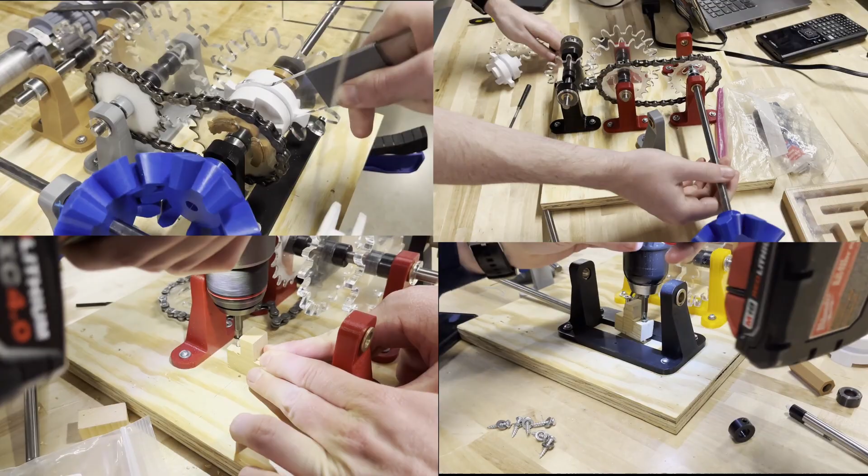The design of our machine first began with the brake. We initially came up with a design in which a pivoting lever impinged on a spring with a semicircular clamp mounted to the end, but it was quickly decided that even with a rubberized coating, this would not provide sufficient static friction to prevent lowering.

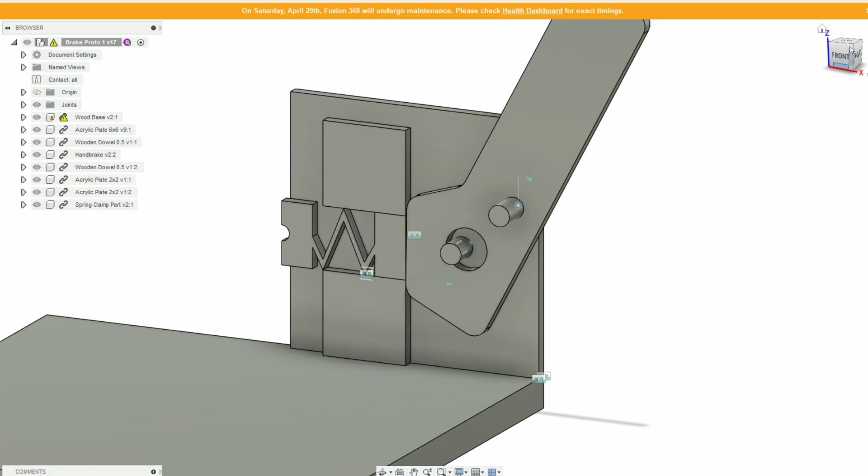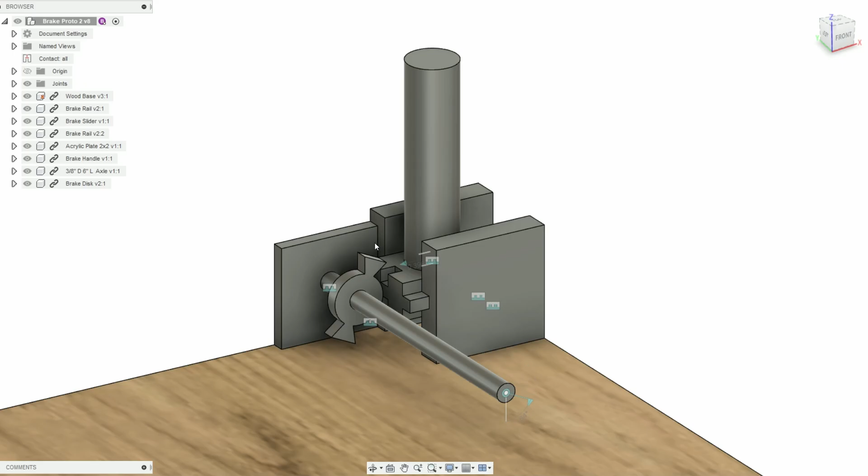We redesigned the brake to work via a disc with two flanges mounted on the axle such that when a block with two cutouts was slid towards the axle, it would catch a flange and prohibit rotation regardless of direction. While this was not our exact final solution, this flange design would be improved upon and used in later iterations.

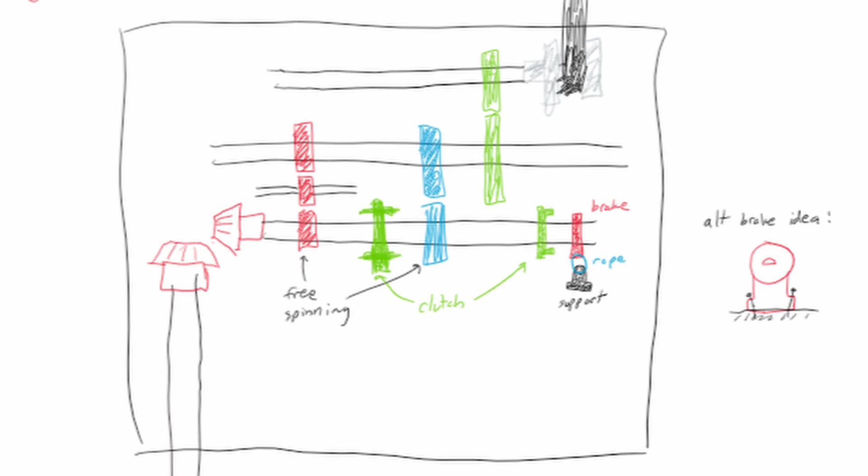The next big hurdle was determining how to achieve both directions of rotation. At first, we thought of having two sets of spur gears, one involving two in direct contact, and the other having a smaller idler gear in between the two main ones to maintain the rotational direction of the initial shaft. We changed the design to have a set of chain-driven sprocket gears running in parallel to the spur gear set, since chains ensure the same direction of rotation.

We designed a sliding plate with a D-profile cutout that had pegs mounted on both sides that would fit into slots on these two free-spinning gears. This way, we could slide this clutch plate into either gear, and the axle it was mounted on could spin in either direction depending upon the mating.

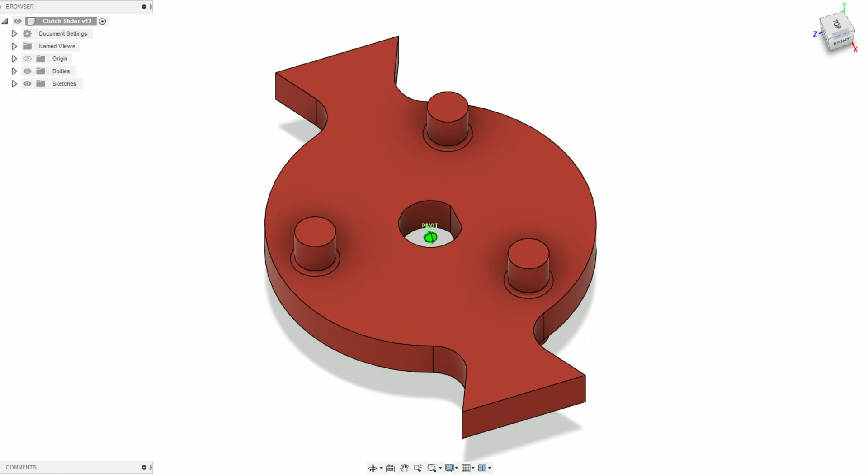We also recognized that we could simplify our previously separate clutch and brake mechanisms into one, by including the flanges seen before on the clutch, and adding a wooden block below the clutch such that when it was slid out of engagement with either gear into neutral, the flange would hit the block and the axle would be prevented from rotating.

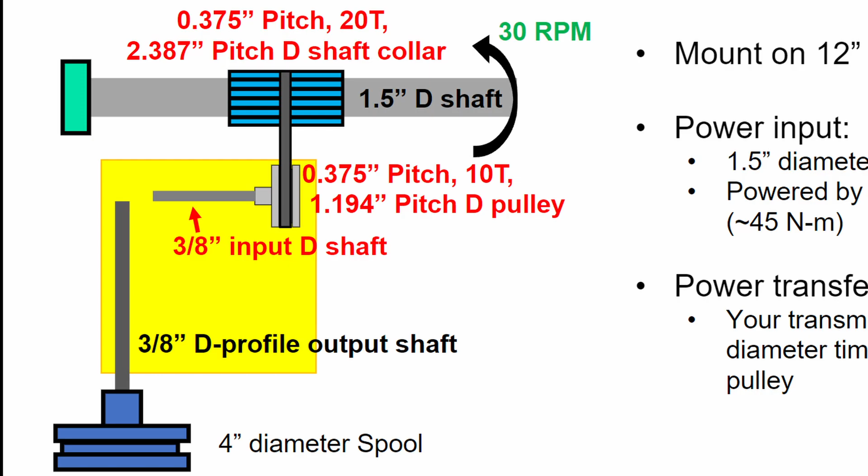After this axle, we needed a way to transmit power to the final output axle, which needed to be mounted 90 degrees to the other ones per the testing setup. Initially, our design only included 12-inch long shafts, which made this directional transition difficult since the output shaft would have to be mounted at a larger height than the others.

But once we found 6-inch shafts were purchasable on McMaster Carr, we made the appropriate redesigns for all shafts to be in plane with each other. After all these components had been largely defined, we began manufacture and assembly.

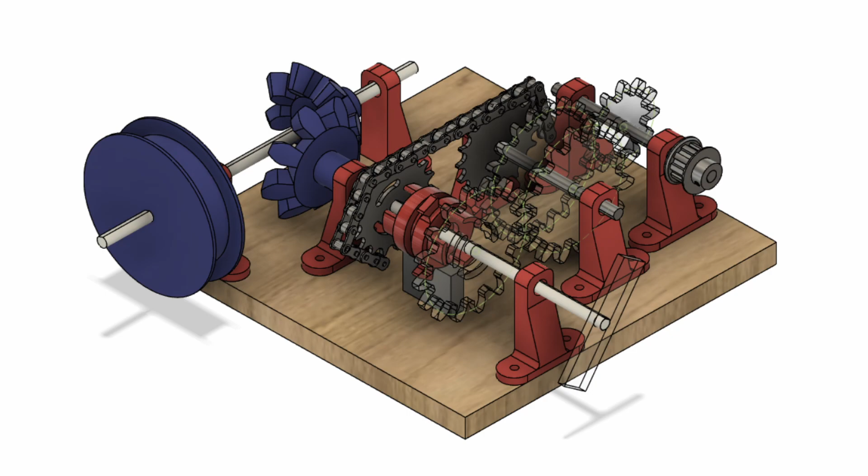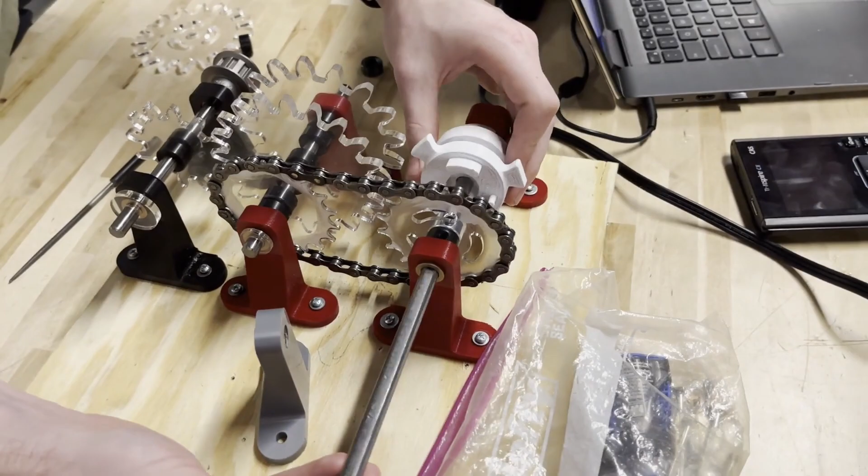After assembly of our first gear train, we began testing our setup in the Innovation Studio. This quickly revealed some issues with shifting our clutch in and out of gear, with our original setup involving poppers that were used to pop the clutch in and out of engagement with the spur and sprocket gears.

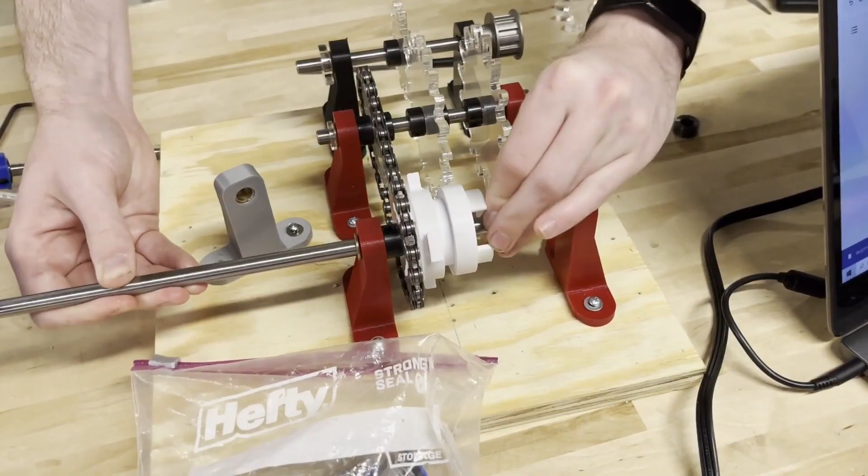After experiencing difficulty, we widened the clutch and put a cutout in the middle so that a semicircular wrench could be used to shift it left and right. We also decided to lengthen the pins to become arcs to improve fitment and strength.

Granny shifting, not double clutching like you should.

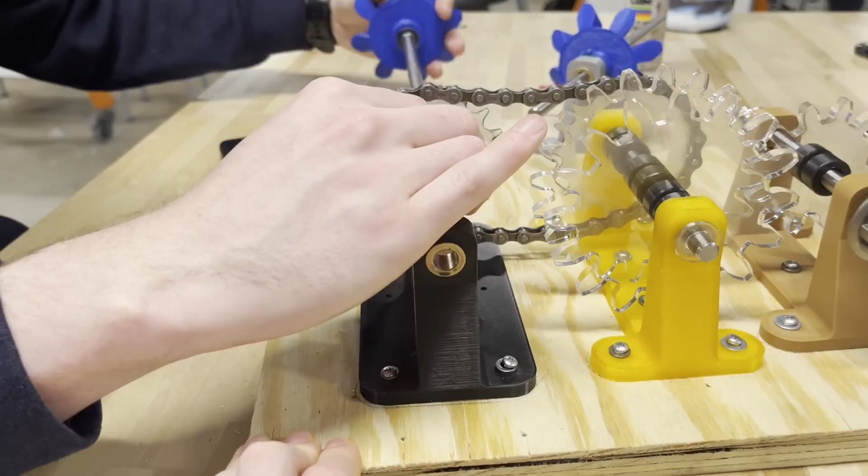Another problem we dealt with was making sprockets that worked well with our length of chain and shaft spacing, since we didn't have the pre-manufactured metallic ones to accompany our chain, which came from a discarded bicycle. We had to cut our own out of 1/8-inch acrylic and then sand them down to the appropriate thickness.

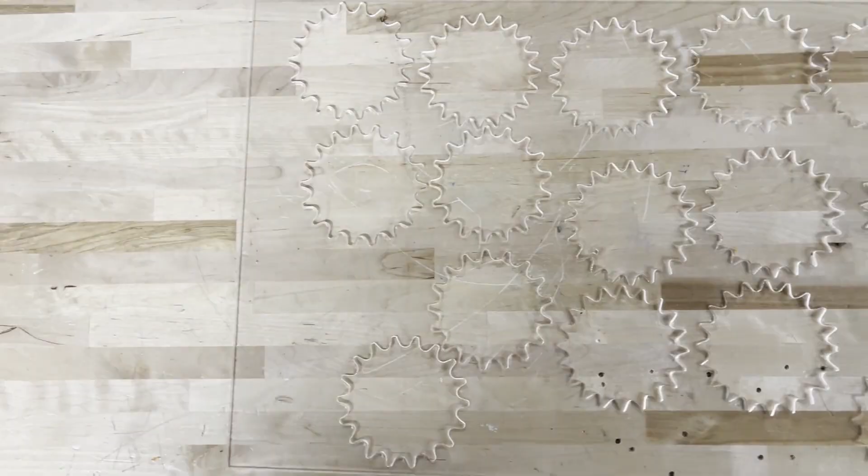We went through quite a few designs, making small tweaks on each until finally cutting a pair that achieved the desired chain tension. Some of you may die, but it's a sacrifice I am willing to make.

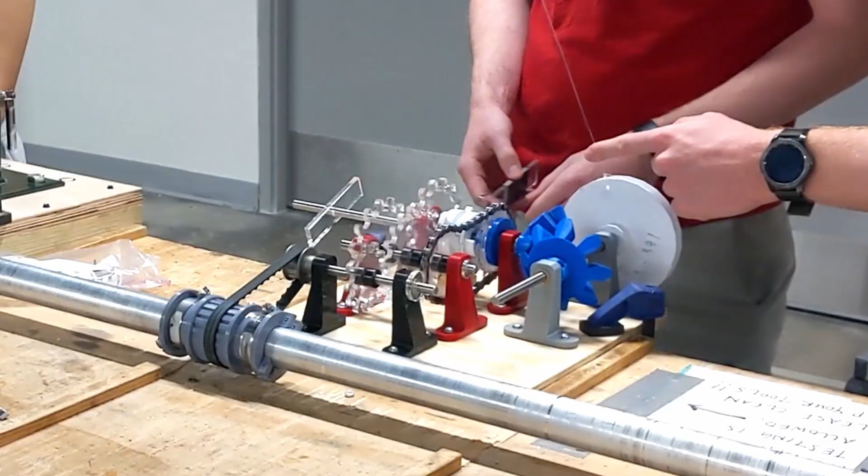However, even after finally making a working pair, they did not remain working forever. While testing our device by having it raise a weight attached to the spool, the D profile on the hole in the drive sprocket sheared and became effectively an O profile, meaning it spun in place when attempting to move a load. To prevent this from happening again, we slightly downscaled our CAD dimensions to ensure a tighter fit between the D profile and the axle.

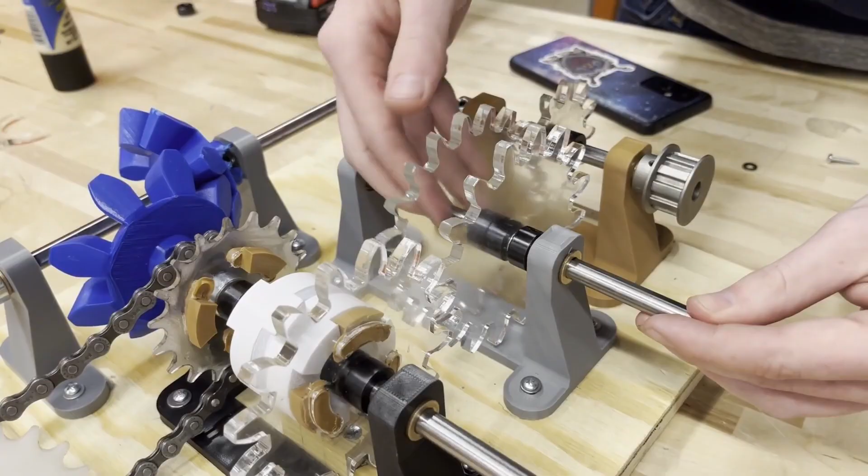A separate change that aided in this prevention was the addition of set screw mounted collars on either side of each unit in our gear train, which both reduced stress on individual gears and slop in positioning, resulting in smoother operation.

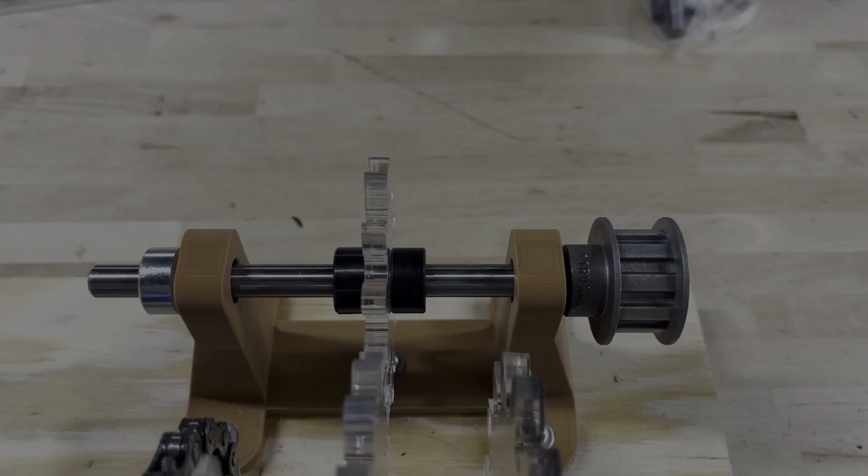At the beginning of the gear train, we have the pulley gear, which connects via pulley to the central powered shaft used during testing. This lies on the same axle as a 12-tooth spur gear, which is in direct contact with a 20-tooth spur gear, as seen here.

This 20-tooth spur gear shares an axle with both a 16-tooth spur gear and an 18-tooth sprocket, both of which are mated to identically sized counterparts on the next axle.

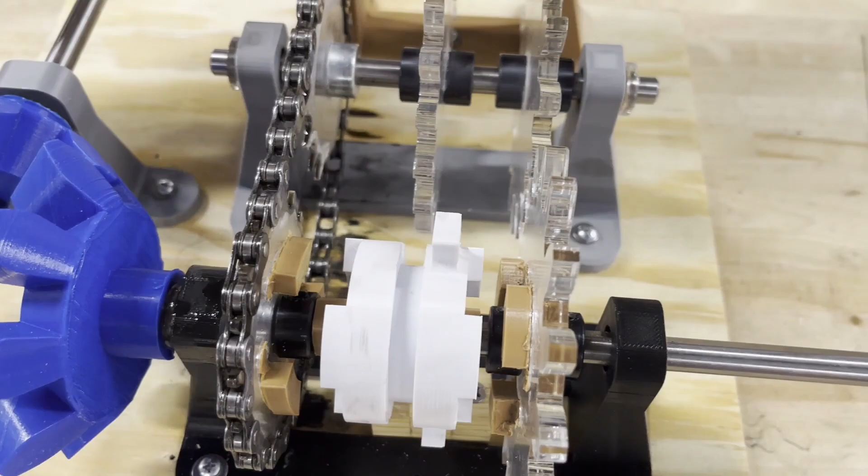However, these counterparts differ in that they have O-profile openings versus the D profiles seen on the other gears, allowing them to freely spin about the axle.

Between these two free spinning gears is a white sliding clutch, which rotates alongside the shaft and has teeth that interface with those seen on the gears in light brown. This makes it so that power transmission from the axle to the gears occurs only when desired, and allows for the bidirectionality of rotation required by the project.

Seen below the clutch is a small wooden brake, which catches flanges sticking out on the clutch such that the wire spool does not unravel due to gravity when the system is in neutral.

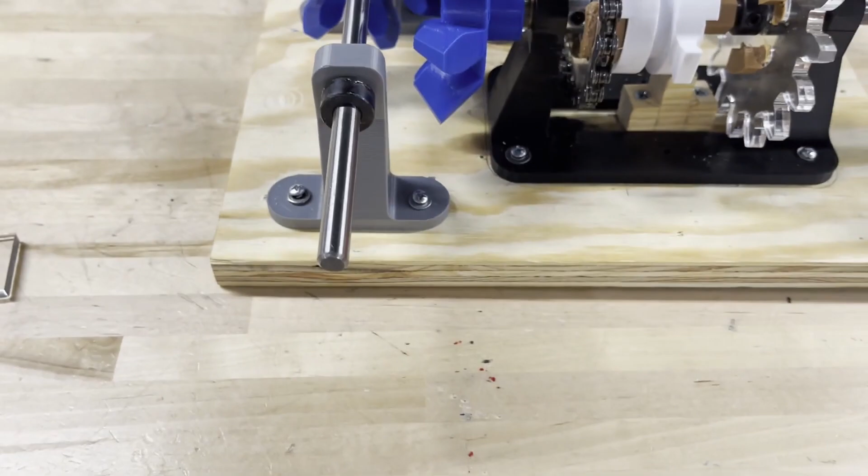At the end of this axle lies a bevel gear, which interfaces with an identical one to provide the 90-degree transferal of motion dictated by the output shaft's location. This final axle then rotates the spool, which raises or lowers the weight.

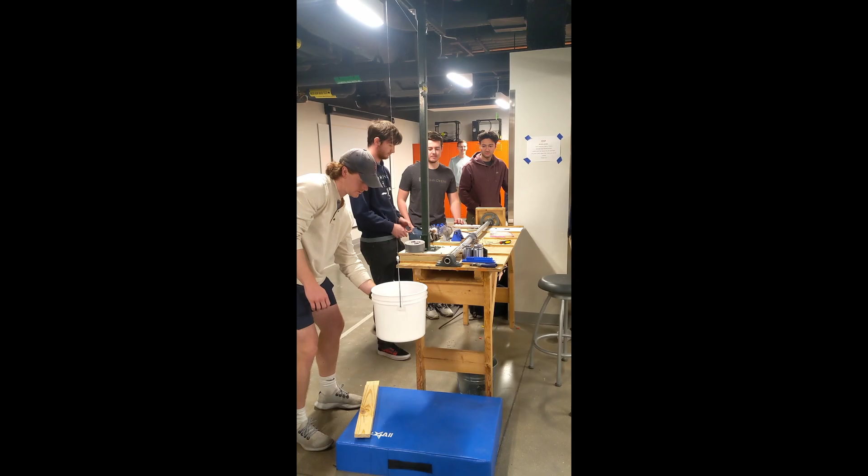On the final day of testing, our machine was able to successfully lift both the empty bucket and the bucket with 1 kilogram of weight added.

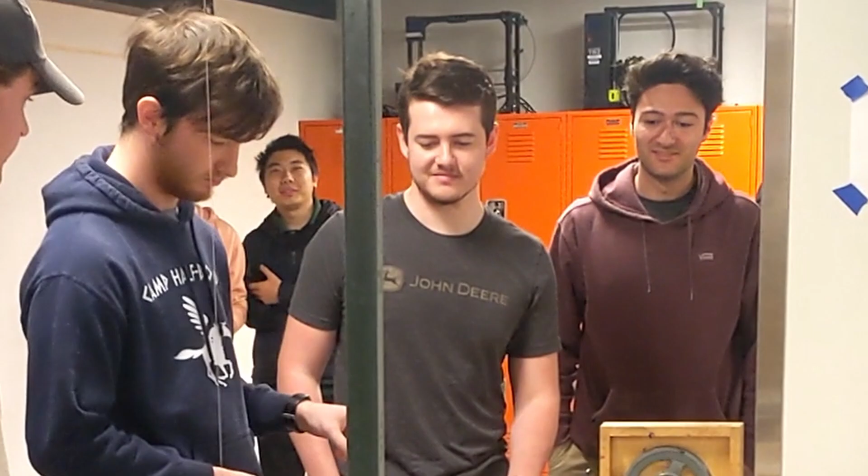Unfortunately, when we attempted to add a second kilogram, one of our bevel gears experienced a shear on its inner D profile similar to the sprocket mentioned before. Throughout our testing, we had not experienced issues with this part and had instead focused on iterating on other parts. In the final test, the gradual wear due to numerous rounds of testing had weakened it enough that it no longer spun with the D shaft.

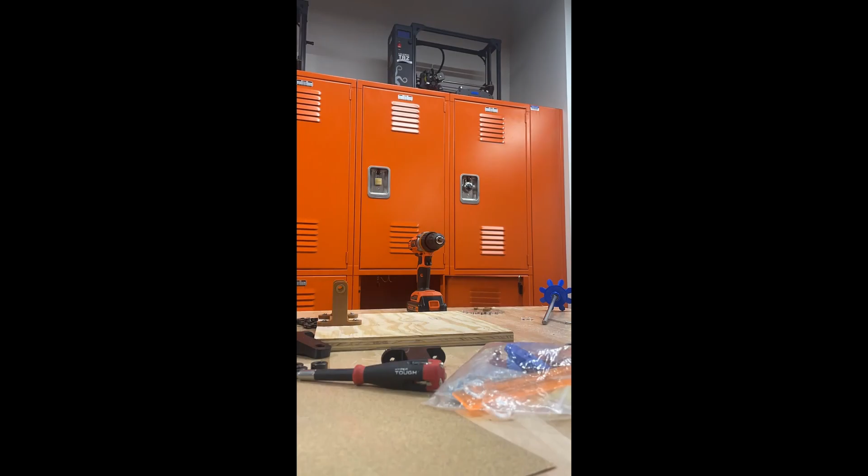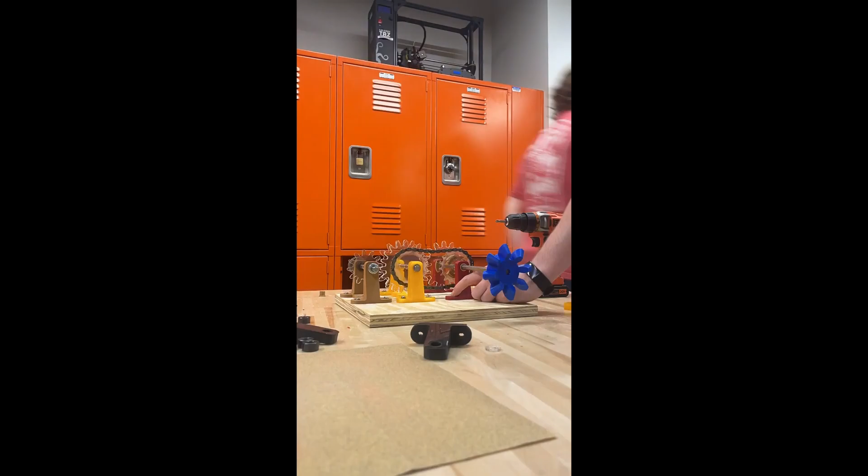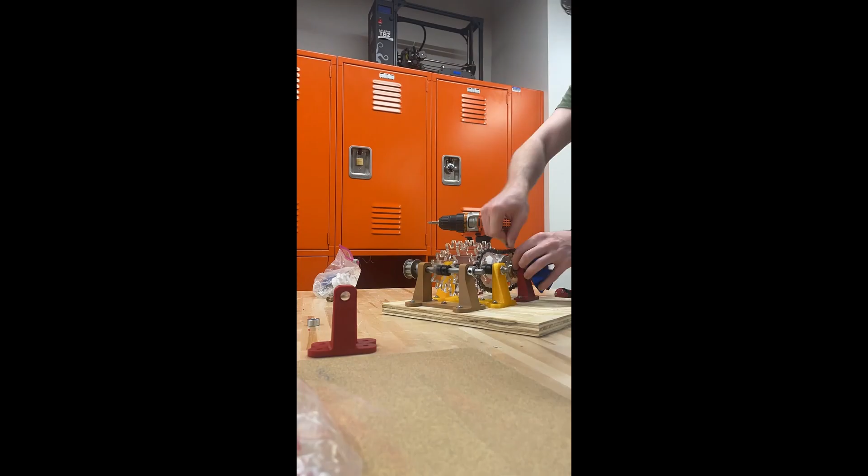Overall, this project helped us gain experience regarding gear design and interactions, and also tolerancing when working with 3D printed and laser cut parts. We also learned to work within the strength limitations of the materials available to us. We refined our task delegation and cooperation skills and successfully stuck to checkpoints we set, discussing solutions to problems when they arose. We believe this is both a worthwhile and engaging academic project, and hope that future classes enjoy completing it as well.